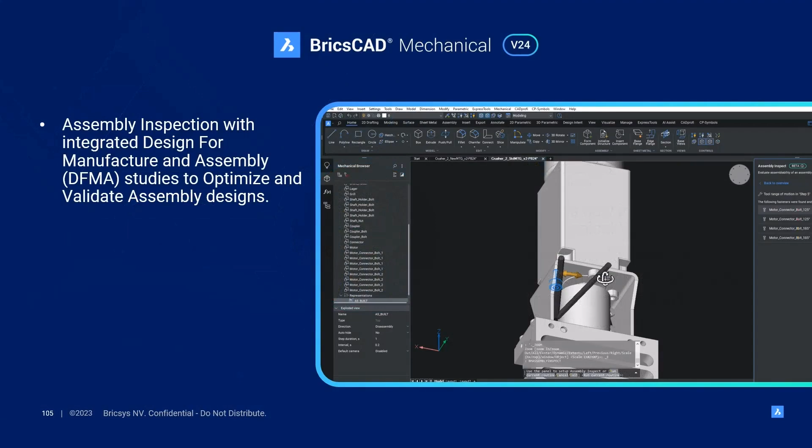In this demo, we're going to walk through the BricsCAD Mechanical design for manufacture and assembly optimization and validation workflow. By integrating DFMA studies into BricsCAD Mechanical, our users can enhance efficiency by identifying cost-effective design changes early, reduce manufacturing complexities, minimize assembly time, and ultimately optimize product manufacturability and assembly processes.

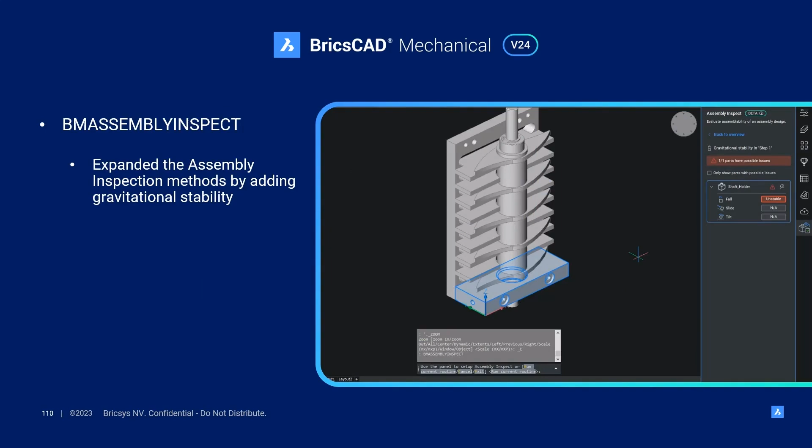In V24.2, we've made some updates to the BM Assembly Inspect feature, which enhance the following workflow. These include expanding the assembly inspection methods by adding gravitational stability, and simplifying the assembly optimization workflow by refining the command panel.

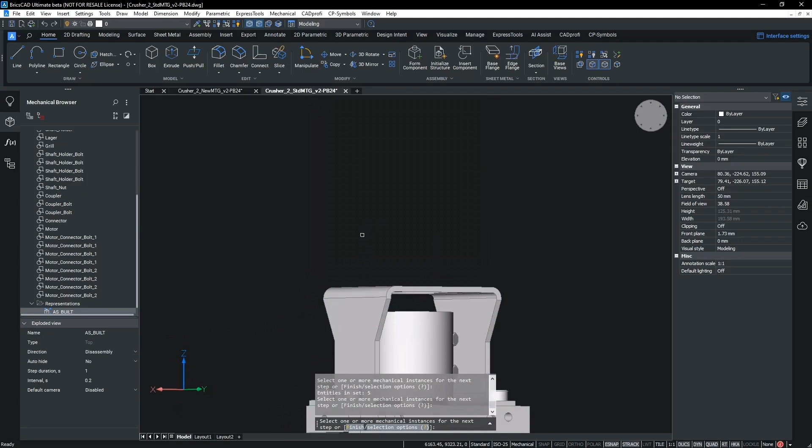Let's open an existing 3D model and start the workflow. First, we're going to create an assembly sequence using the BM sequence command. We create build steps which mirror the sequence in which components would be assembled in the real world.

Now we move into the inspection phase of the workflow. We run the BM assembly inspect command. This feature is still in beta stage and is being continuously improved. Today, we're going to focus on the tool usage and the new gravitational stability aspects of Assembly Inspect.

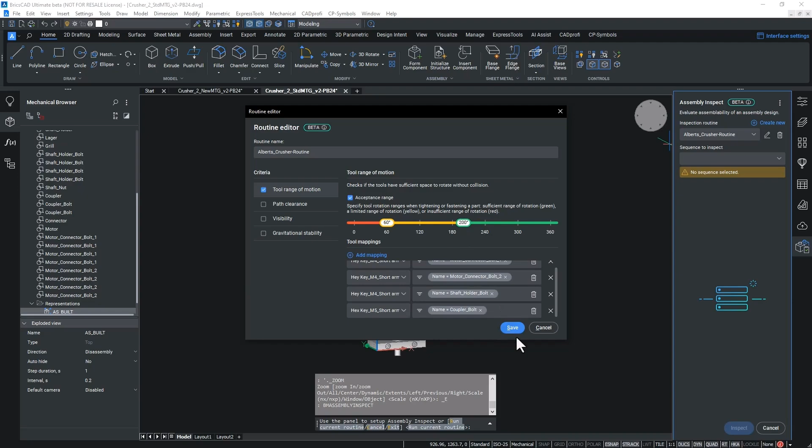Tool usage evaluates whether tools have a sufficient range of motion in reference to their position within the assembly at a given sequence step. The idea of gravitational stability is to verify whether the component would be gravitationally stable before fixing the fastener. It's mostly for ergonomic reasons. If it is stable, even without fasteners, the assembly person can use both hands to pick a fastener and a tool.

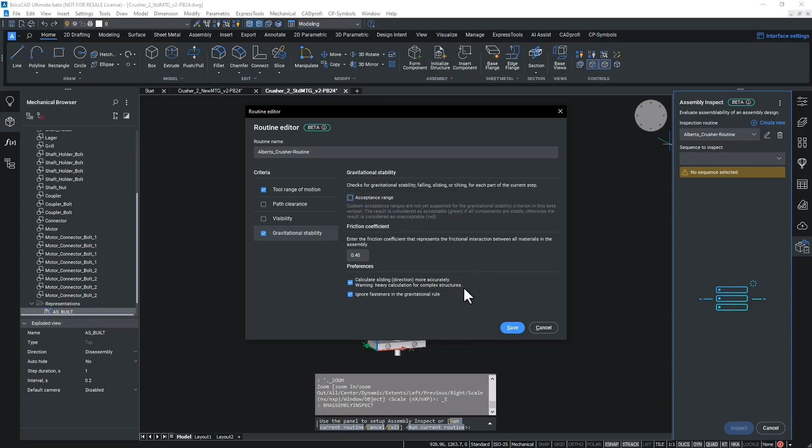Gravitational stability is new to Assembly Inspect. However, we've also made changes to the feature dialog, putting everything in one place. By opening the Assembly Inspect settings, we can add the tools required for evaluating the assembly.

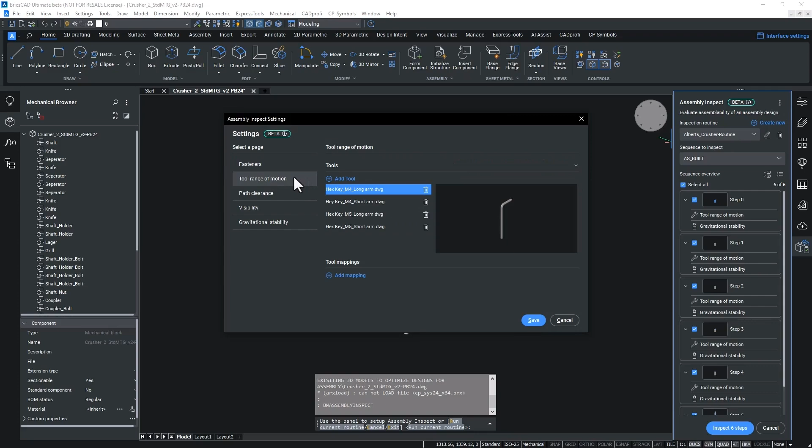With BricsCAD Mechanical V24.2, there is a standard toolkit supplied with the install of the software. There is a possibility of customers using their own specialist tooling and adding these to the study. Once the required tooling has been added to the study, we can now map the specific tool to its corresponding fastener or fitting. This is done via the routine editor dialog.

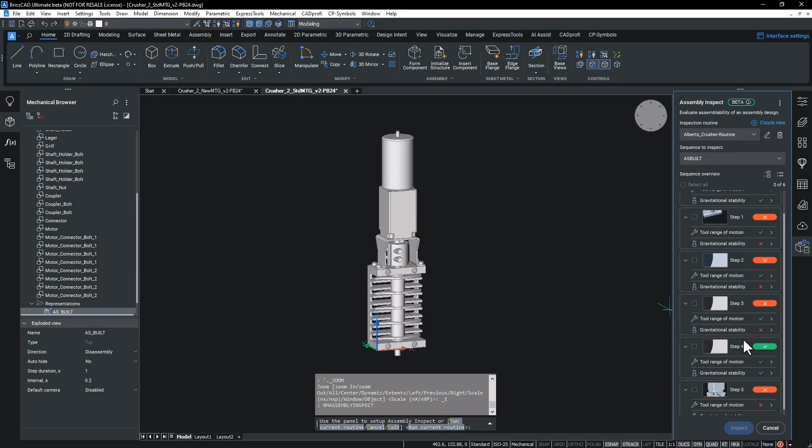Once we've selected the assembly sequence we created earlier, we can see all the steps appear with options to study individual parts and testing criteria. With the test run, we now see the results. The new dialog UI efficiently and easily displays the results within each step and with each testing criteria. It also gives an overall result based on the individual criteria results.

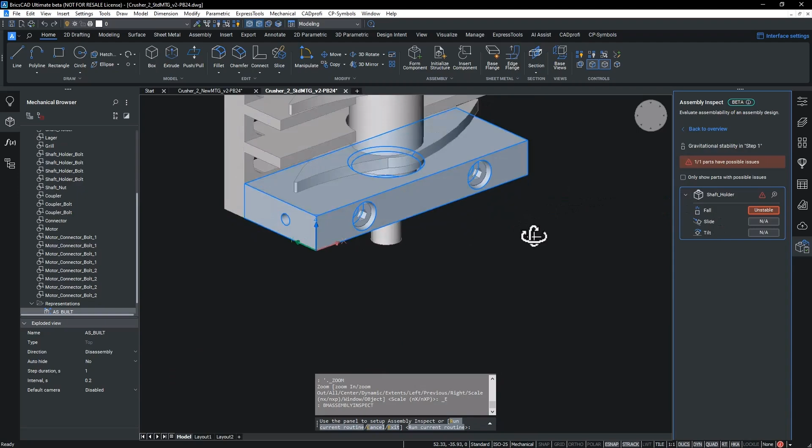We can see that in step 1, in regards to the tool usage criteria, the fasteners are completely unrestricted, and the same is true for step 2. However, both these steps raise possible issues for gravitational stability, whereby the part has been classed unstable in the fall criteria. This result indicates that special attention needs to be paid to the orientation of the assembly at these steps.

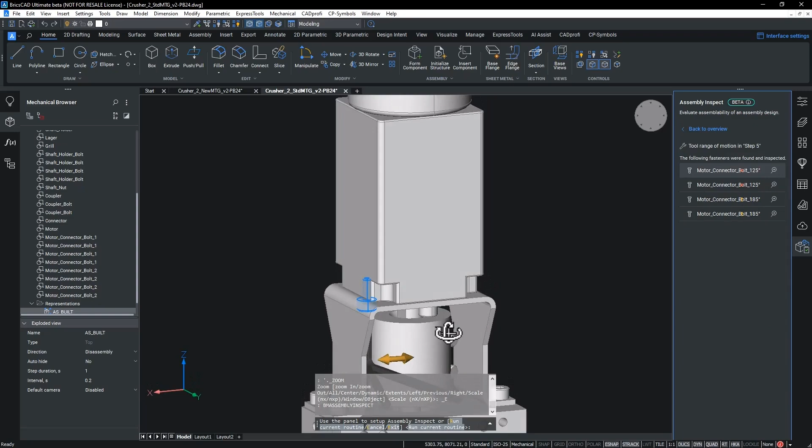Step 5 has raised a potential issue in terms of tool usage. 2 of the fasteners only allow for 125 degrees range of travel. This result would indicate a possible design change to allow for more travel.

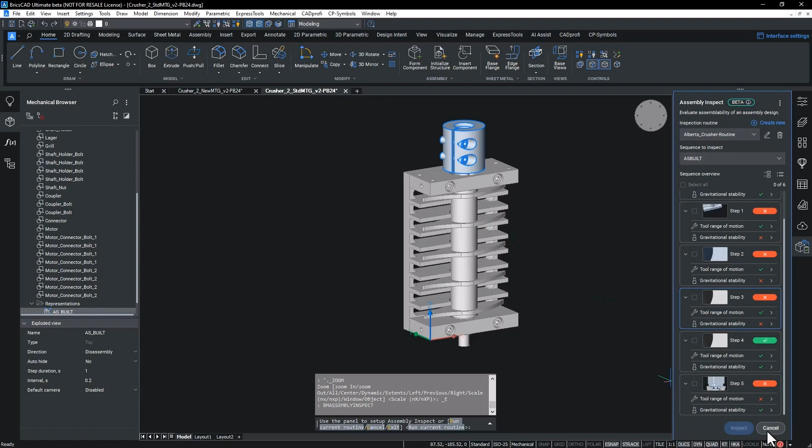Overall, the results of the Assembly Inspect feature should be used to verify the design and the assemblability of a product. It should be used to highlight potential corrective action measures, which can come in the form of design changes, identifying the most efficient assembly and tool orientation, as well as the steps which will require special attention from the technician.

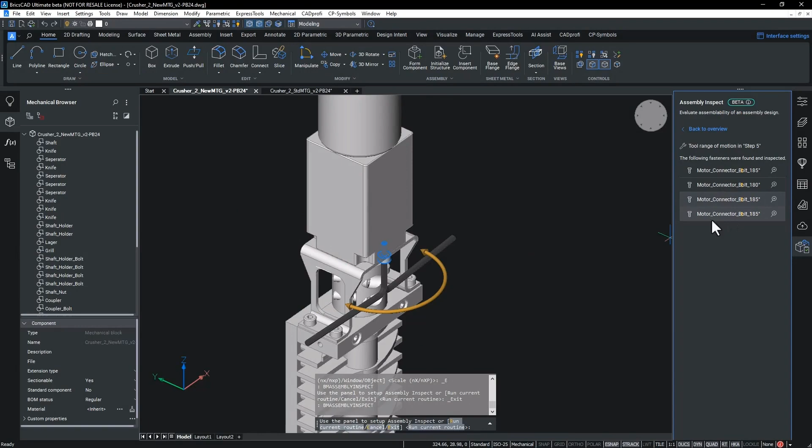In this updated model, we've taken corrective action measures based on the original test results. We will now rerun the test on the new model. By adding a hole on either side of the mounting bracket, we have been able to improve the tool range of travel at step 5 to 185 degrees, a drastic improvement compared to the original design.

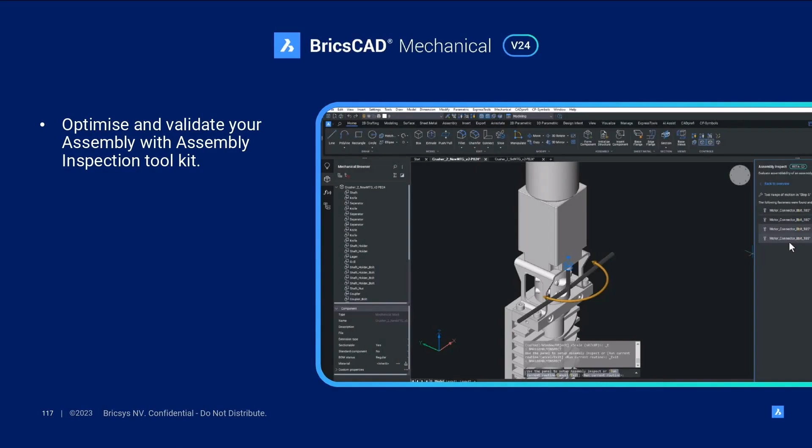In this workflow demo, we've shown that with BricsCAD Mechanical, you can optimize and validate your assembly designs with our Assembly Inspection Workflow Toolkit. At Bricsys, we continue to innovate and update our features, like here in V24.2, where we introduced the gravitational stability criteria to assembly inspection, as well as an updated feature dialog to create a more seamless workflow.